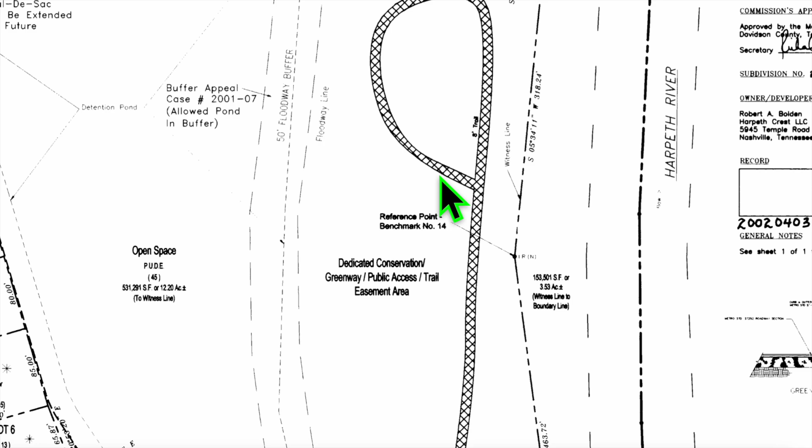It stopped there because there's this channel here. It's actually shown on the plat as the walking trail loops back into itself like a 9, and I'll show you that in just a second. The point is really important here, that it doesn't just stop there because that's where they stopped. It stops there because they're not supposed to interfere with that drainage channel. I call it the 9 coming back. It even gives the specified width of the trail to be about 8 feet, so it was not an accident that it looped back there. It's shown as terminating.

This is the Harpeth River. The Harpeth River flows in this direction, going this way.

As a historical note, the Harpeth River actually used to flow all the way up here and then come back down. But they moved the river south of where the interstate is when they put the interstate in. My understanding is that's because they didn't want to have to build a second bridge, so instead they just rerouted the entire river south.

The net result of that is that you basically have lowlands here, which turns into wetlands when it rains hard. So that's why this area here is soccer fields. It's owned by the state, but they're not useful for anything else because it floods all the time. I'll show you that more in detail in just a minute.

So here's the same area, looking at it through Nashville's parcel viewer system. This is what you're looking at right now is 2023 imagery. What I'm going to do is switch to the 2010 flood imagery and show you kind of what I was talking about before about the lowland area here.

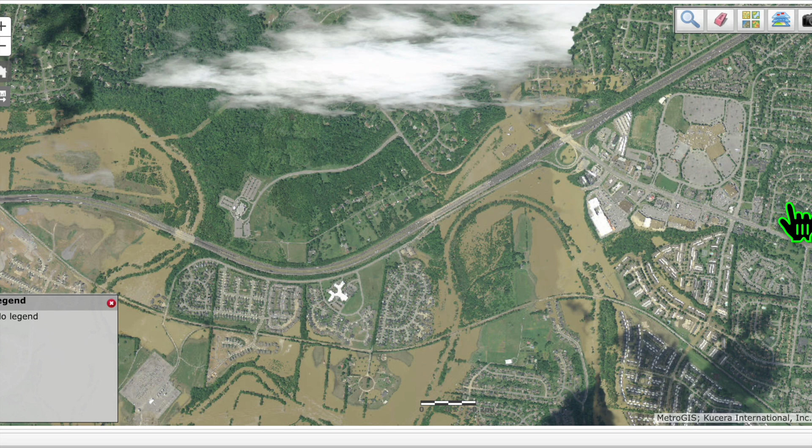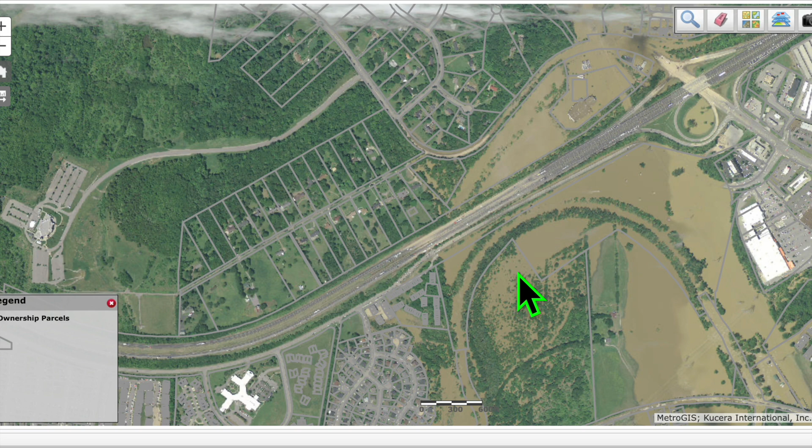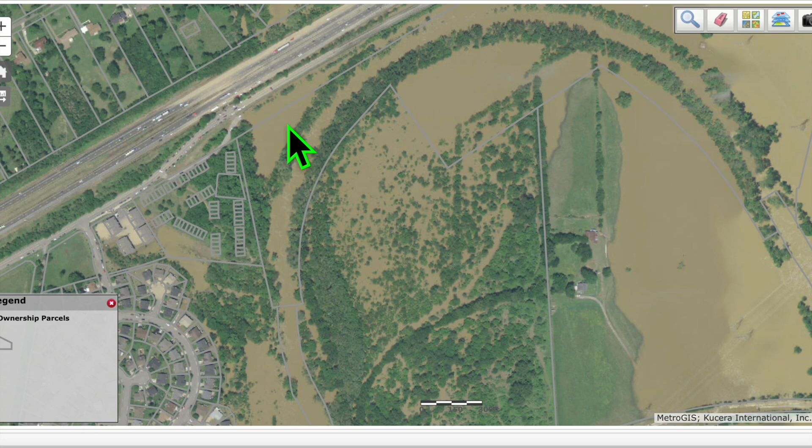So as you can see, this is the outline of the old river before they moved it, with Interstate 40 bisecting that area. You can actually see that Interstate 40 here is clear and passable. This imagery is actually after the crest, because for almost 2 days, I believe, Interstate 40 was impassable, and so the water was considerably higher than actually what is seen here. So you can still see the remnants of the flood, but it's passable right now in this image.

So here you can see how, even though the water has gone down, how jeopardized these homes were here. Their mailboxes were underwater. A number of them flooded almost up to the second story, I believe. And all of this area is underwater. I'll show you some pictures of that from actually this hillside right here looking out, some pictures of what this looked like from that point of view.

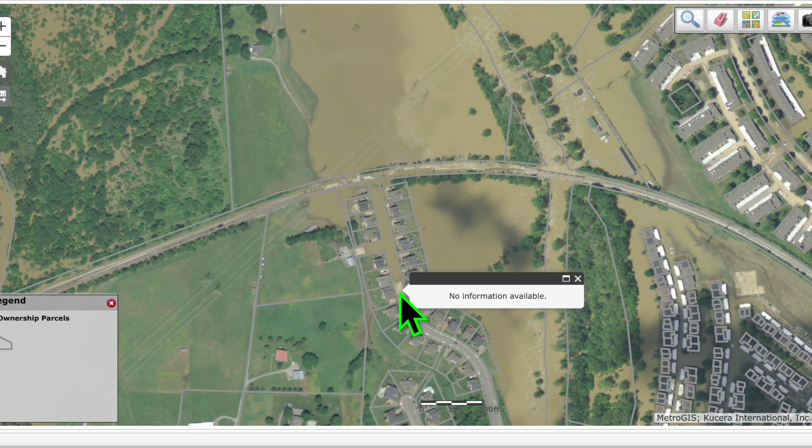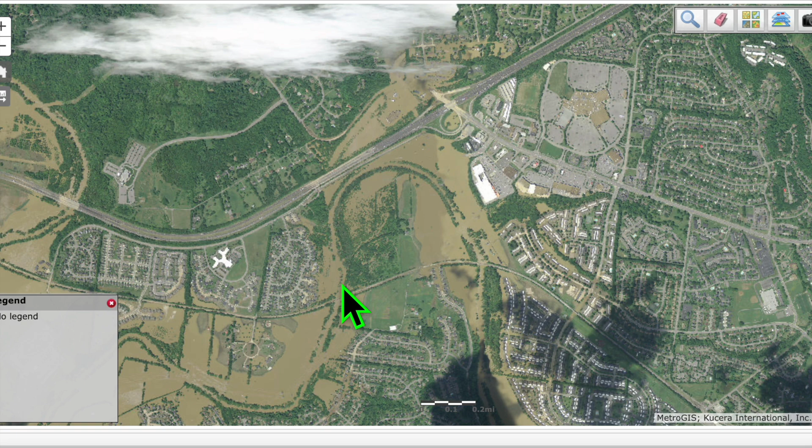This is obviously the flood detention system area here that I'm going to talk about. And this is the course of the river here. So what I'm going to do now is insert the FEMA flood overlay.

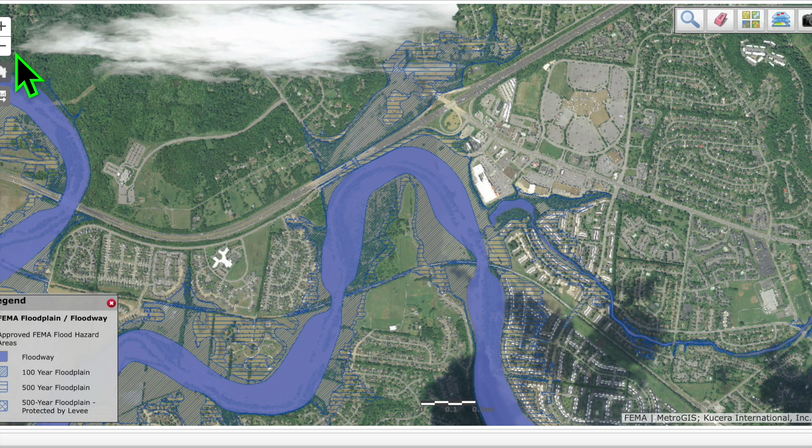So obviously dark blue is the floodway. The close hashes are the 100-year floodplain, and the broader hashes are the 500-year floodplain.

The regulatory standard to get something approved in Nashville, and maybe nationwide, is that if it has an effect on the 100-year floodplain, it cannot be approved, or it's less likely to be approved. They don't look at all at the 500-year floodplain as far as regulatory considerations.

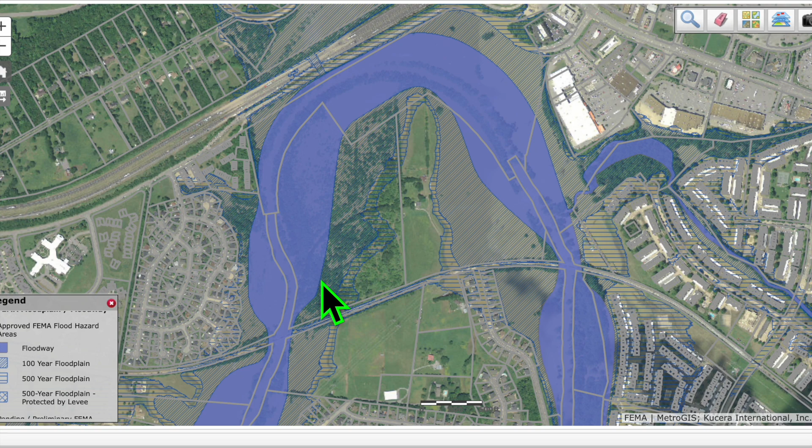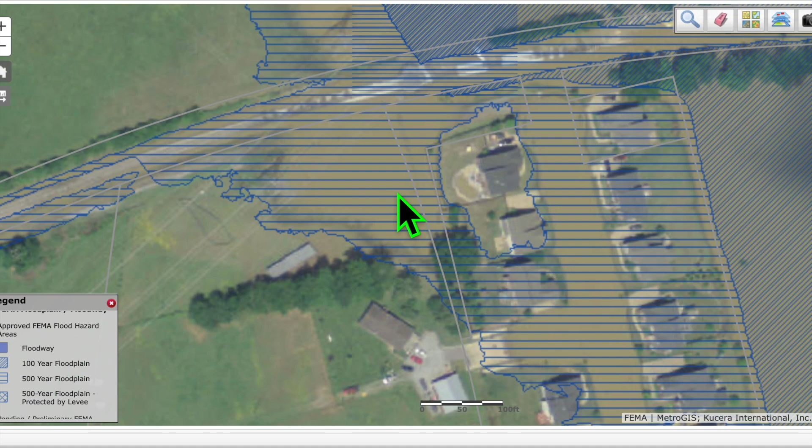They have acknowledged that this project is going to affect the 500-year floodplain, and that's concerning to us because, as you can see here, there are a number of homes in the 500-year floodplain, for starters. That means if they flood, they will flood worse.

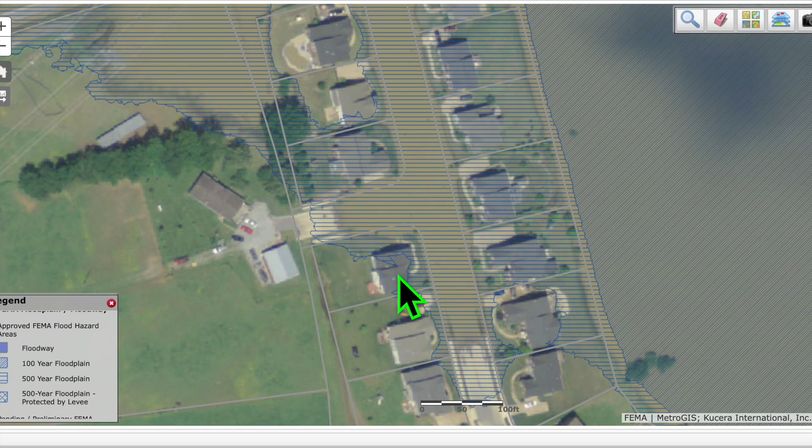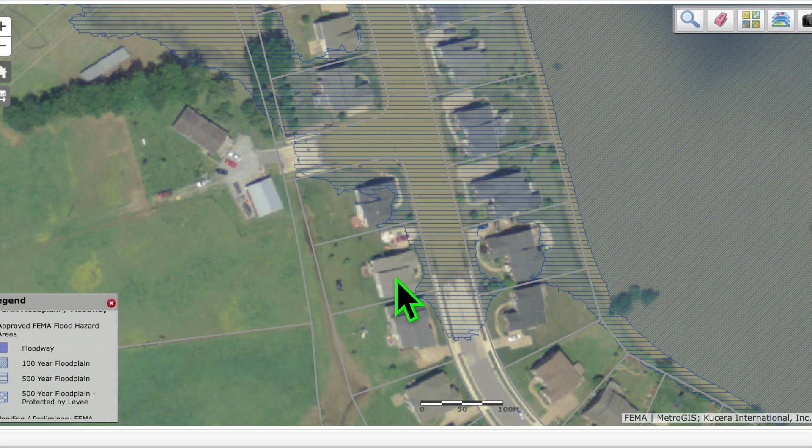There are a couple here that flooded, and parts of the homes were saved. There's one home here that flooded up to their crawl space, but the rest of their home was spared, and any rise in the flood level would harm them.

There are about 5 or 6 houses that are right on the edge here. Their flood modeling, from what we have seen, does not consider either this area here or these homes here.

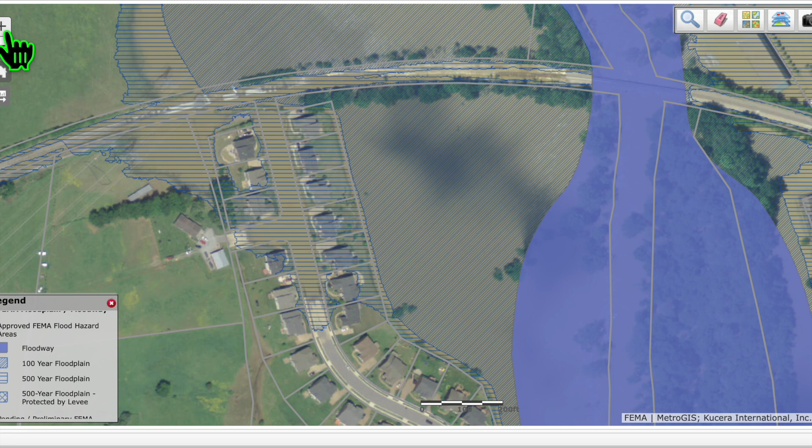If there's something to that, then they should explain it to us, but we have not seen that. We've seen their roughly 400 pages of flood modeling, and it doesn't seem to indicate any consideration of what's happening here or here.

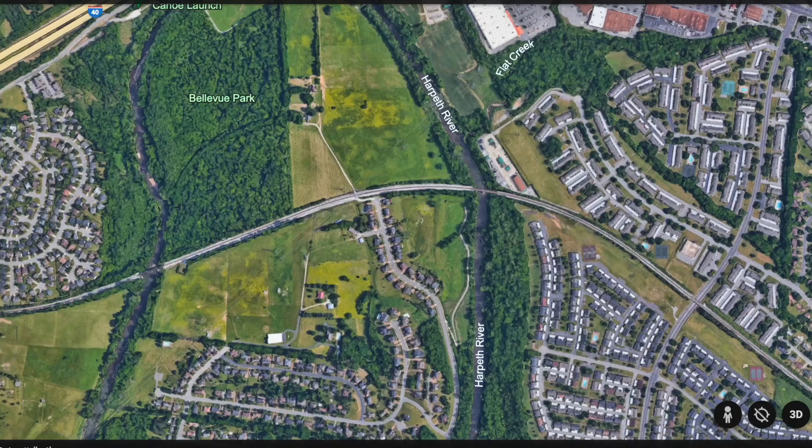Just wanted to show you where these next pictures I'm about to show you were taken from. Here's the subject parcel, here's the neighborhood. These next pictures were taken from right here, looking generally this direction. So this is a hillside here, looking basically this direction. I just want to provide that context.

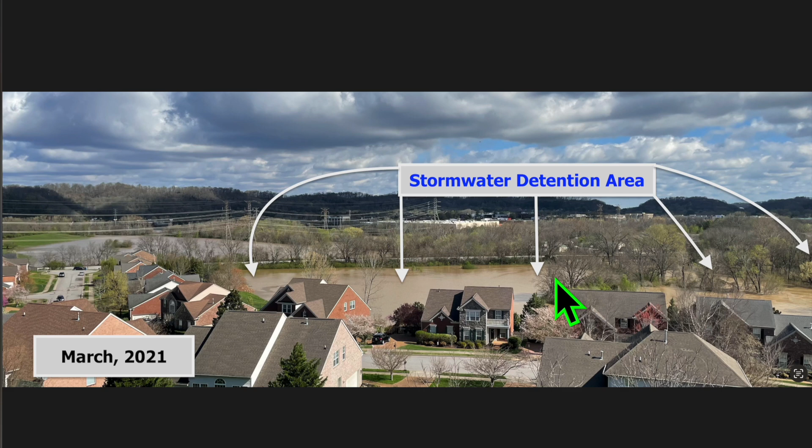So here's that same image just from a little more recently. I'm just going to get you to see where the stormwater detention system is and what it looks like when it's dry. So here it is. There are a series of levees, ditches, and it's a relatively sophisticated system, as I will show you in plans in just a second. You'll see the walking trail there is just adjacent to the riverbank.

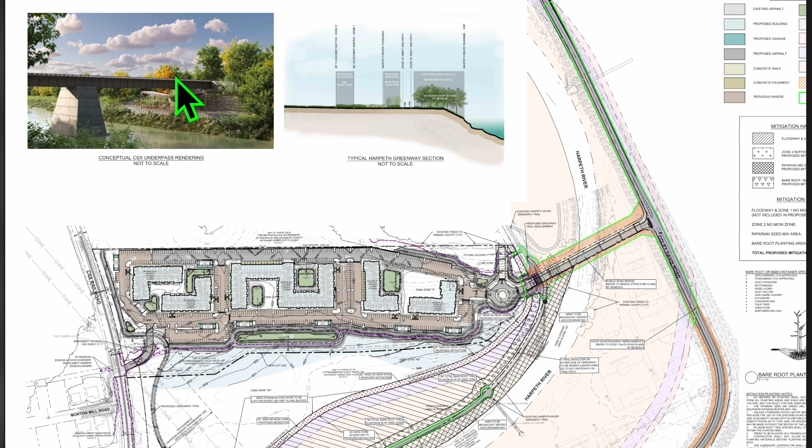So this is from Ariza's most recent application. And what you can see here is their plan for the walkway across there. This is actually looking at it sort of from the opposite direction. The drone footage was coming from this direction, but now we're looking at it this direction. So I'll zoom in here a little bit. Zoom in more. And so that's what you can get a sense of what they have planned for it.

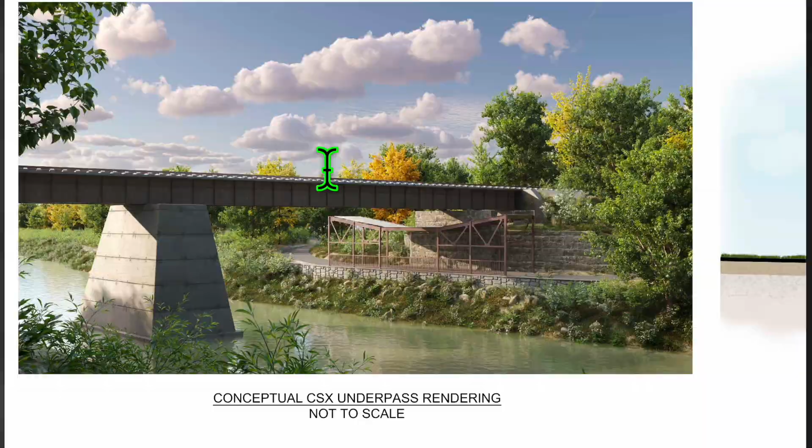So you don't have to be anywhere near the 500-year flood height to be in a circumstance where it's going to wash away not just the structure, but anybody who's down there. I mean, obviously, people probably try to get out of the way before then, but there are people who sometimes stay under bridges, so it's not just a theoretical concern here.

I won't bore you with all of the details of the legal issues, but just for context, we have the plat of the neighborhood. In one of the notes of the plat, it incorporates the stormwater detention agreement, and then the stormwater detention agreement references the Batson site plans. I want to show you the Batson site plans so you can understand how intricate the stormwater detention system is. So we'll get to that in just a second.

All right, so here's the site development plans. I call them the Batson plans because that's who they were done by.

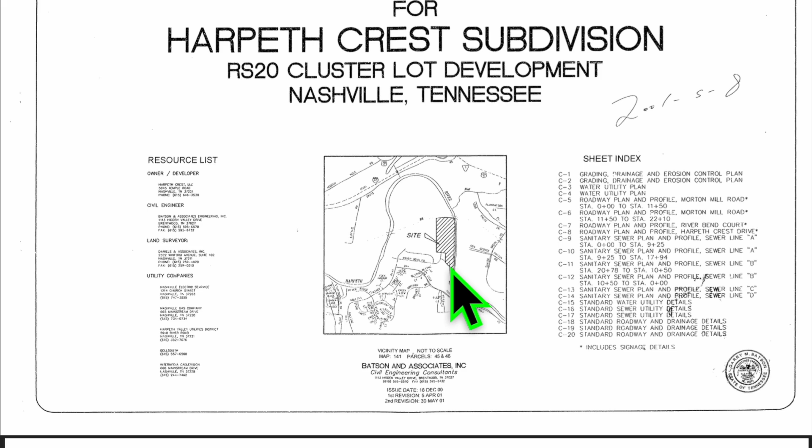And you can see this is some of the system, but the majority of the system is shown right here on this page C2. You can see it draws the levees, has the channel here, and the drainage ditch, or the culvert, or whatever they call that. So with all of these different labels and measurements, it's not something that was just haphazardly thrown together or that was already there before they started developing the property.

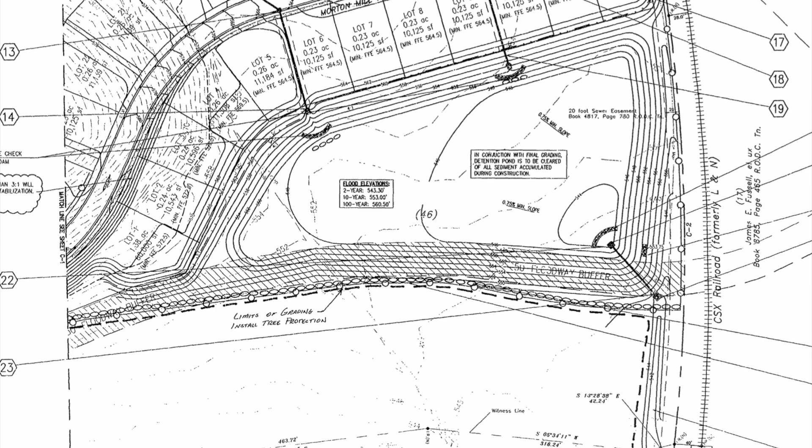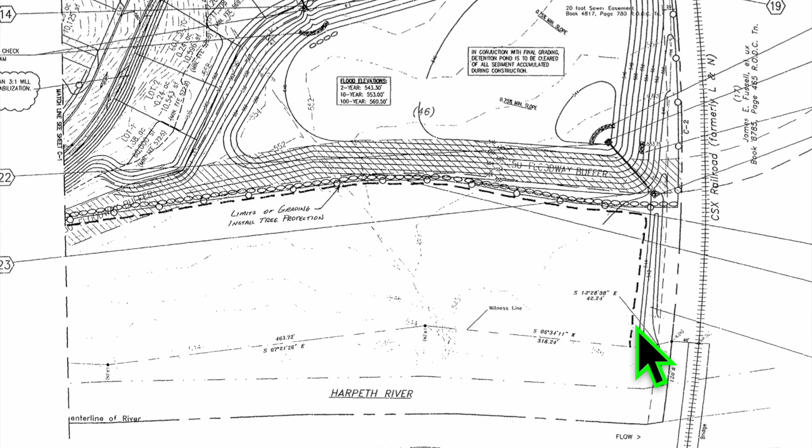The whole point of the Batson plans is that the stormwater management agreement requires adherence to the Batson plans. And what they want to do with respect to the riverbank and blocking this channel here is in contravention of the Batson plans. Moreover, there's terms and conditions in the stormwater management agreement, stormwater detention agreement that prohibit them from doing what they want to do.

Okay, so here's where it gets a little confusing, convoluted, and circular and nonsensical, I think. In order to build this project, the developer needs to get a series of variances granted by the Stormwater Management Commission. This is the developer's application to the Stormwater Management Commission to have these variances granted. According to the law, a certain number of things are required in order to have a variance granted, and it's all these things in this paragraph here.

And so 1, 2, and 3 — it's all 3 because of the word here is 'and.' It says the variance request meets the following conditions: a showing of good and sufficient cause, a determination that the failure to grant the variance would result in exceptional hardship, and 3, a determination that the granting of a variance will not result in increased flood heights, additional threats to public safety, or extraordinary public expense, create nuisance, cause fraud or victimization on the public, or conflict with existing local laws or ordinances.

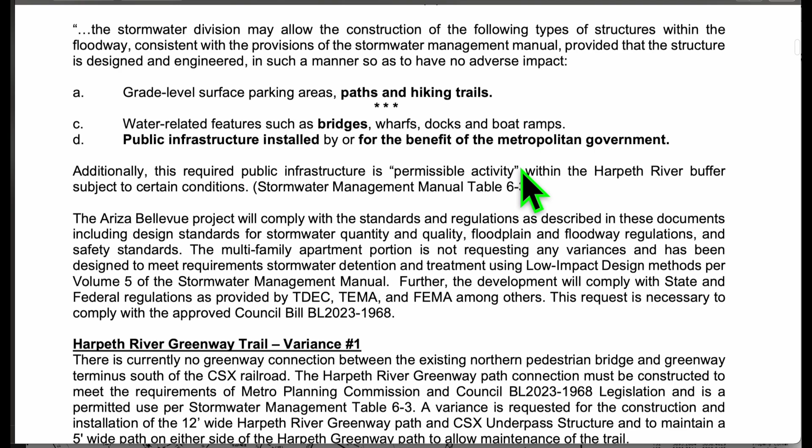So let's just talk about 2 for starters. Let's talk about the hardship, the exceptional hardship. They make a statement as to why they think they have an exceptional hardship. And that is right here.

What they say is: preventing development of the property by denying the variance would result in exceptional hardship, since the variance is required to meet other Metro regulations, Metro Planning Commission and Council BL 2023-1968 legislation. That legislation is the SP that the developer designed, negotiated over the course of a couple years with council and the planning commission. And basically what they're saying is we have designed a project that is not in accordance with the law.

Not to get too much further into the weeds, but they also fail to meet Roman numeral 3. There will be additional threats to public safety and additional nuisance. Obviously nuisance is sort of vague, but they are destroying our trees, taking them against our permission, destroying our riverbank against our permission and in violation of the plat. But they're also actually posing additional threats to public safety.